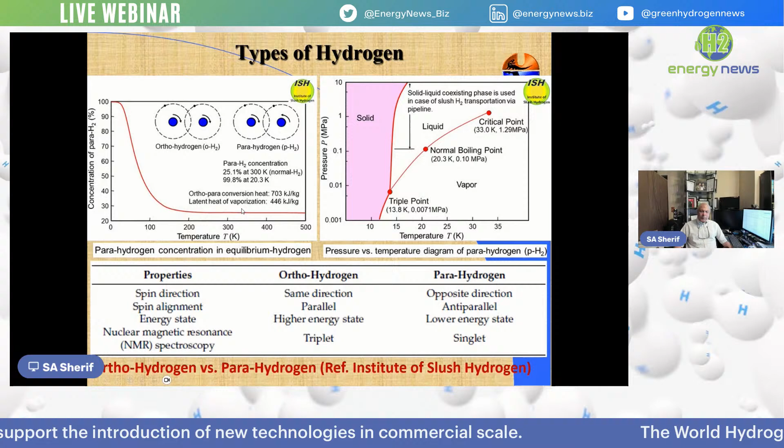Now if you look at the bottom of this slide, you'll see the distinction between orthohydrogen and parahydrogen is in several features. One is the spin direction - the nuclear spin is in the opposite direction for parahydrogen. If you compare the top left part of the slide to orthohydrogen, the spin is in the same direction. The spin alignment is also parallel, so-called parallel in ortho and anti-parallel in para.

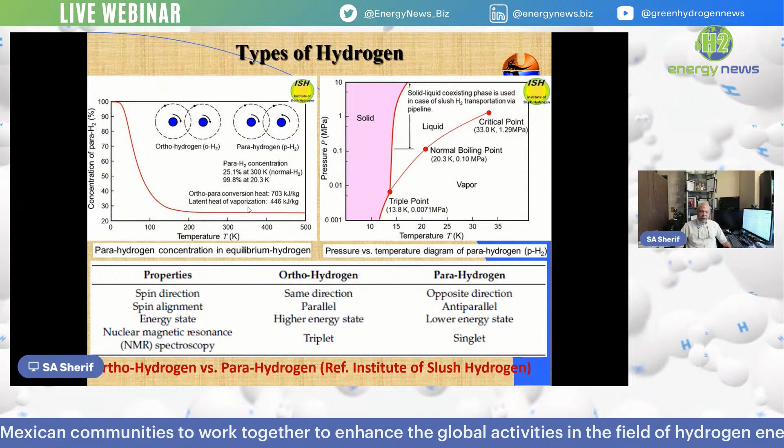The energy state is higher in ortho - that's the higher energy state and less stable form. The nuclear magnetic resonance spectroscopy is triplet for orthohydrogen and singlet for parahydrogen. This information came from the Institute of Slush Hydrogen - they have it on their website.

Now let's talk about the Joule-Thomson coefficient. It is thermodynamically defined as the ratio between the temperature decrease and the pressure decrease, meaning the temperature gradient to the pressure gradient - partial T, partial P - and you have to do that at constant enthalpy to get the exact definition of the Joule-Thomson coefficient.

The Joule-Thomson coefficient should, in general, be a positive number, because as the temperature goes down, the pressure goes down, and as the pressure goes up, the temperature goes up, and so on. So they always go hand in hand.

But in some cases you may have a negative Joule-Thomson coefficient, which means that expanding - reducing the pressure, putting hydrogen in a bigger container at lower pressure - you would expect the temperature to go down, meaning a cooling process. In some cases you may actually have a rise in temperature when that happens, and that's what we call the inversion temperature.

The inversion temperature is where the Joule-Thomson process, which is an isenthalpic expansion process in a Joule-Thomson valve, occurs - typically the case when you have flow going through a valve, ignoring kinetic and potential energy, from the entrance to the exit of the valve. You'll find that the enthalpy remains constant across the valve. This is what we call a Joule-Thomson process, or Joule-Thomson valve. The inversion temperature for hydrogen is about 200 Kelvin.

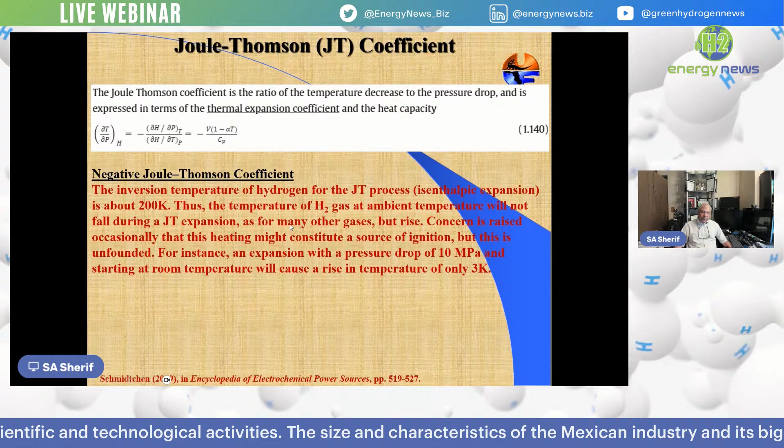Some people think that might cause ignition, but if you drop the pressure from about 10 megapascal, which is huge, keep in mind atmospheric pressure is 100 kilopascal, that's 0.1 megapascal, if you drop the pressure by 10 megapascal, you only have a rise in temperature of about 3 degrees Kelvin, or 3 degrees Celsius.

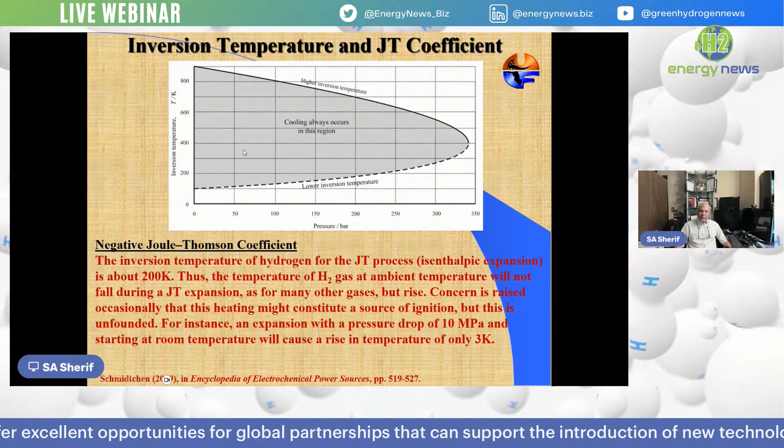It's the same thing. Now, the inversion temperature and the Joule-Thomson coefficient are best represented, in this case, for air. We took air as an example. You will see that the inversion temperature has a maximum value and a minimum value. The inversion temperature for air has a maximum value of about 850 degrees Kelvin, and a minimum value of about 100 Kelvin.

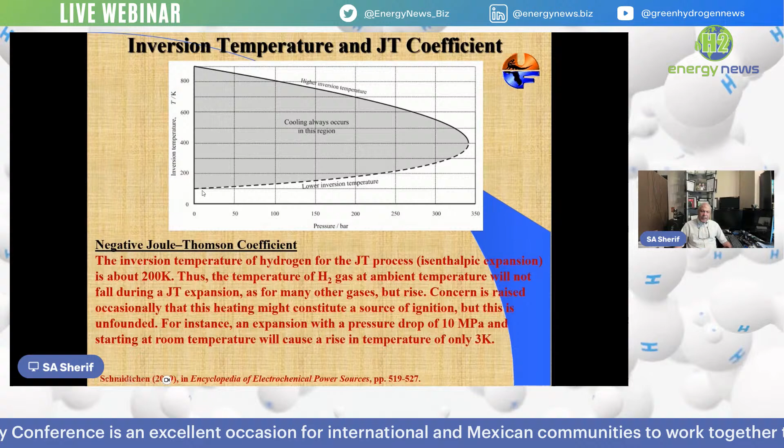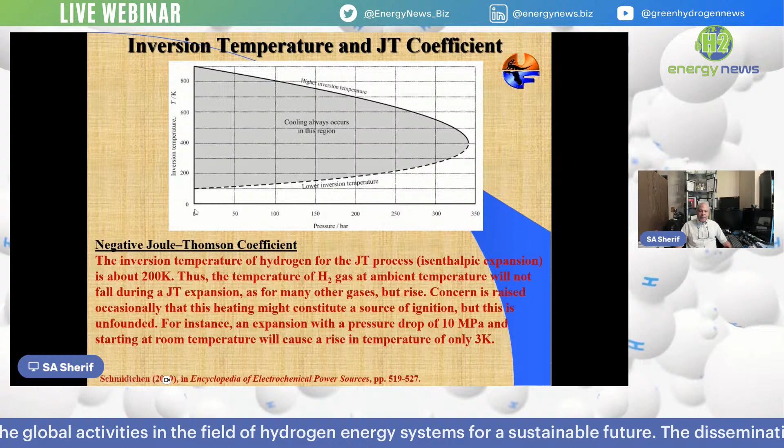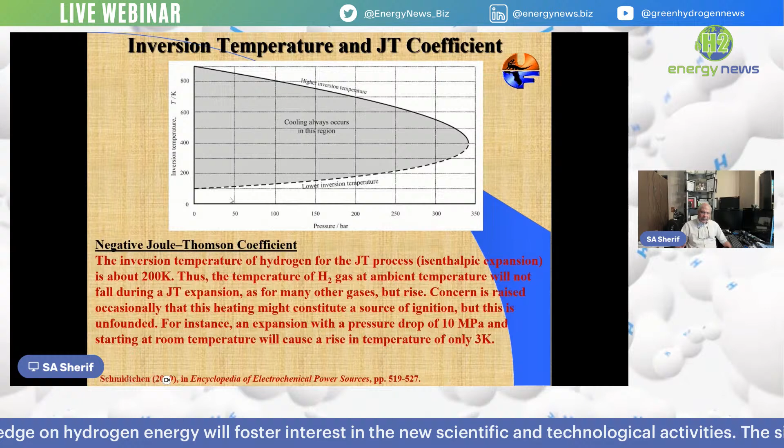So you can see the lower inversion curve and the higher inversion curve. Essentially, what I'm saying is that in order for you to reach a minimum or maximum inversion temperature, the pressure has to be zero. You can see where the pressure is zero on the horizontal axis. Both the lower inversion curve and the higher inversion curve hit the vertical axis, meaning the pressure is zero. The values associated with those two points would be the lower, or minimum, and maximum inversion temperature for air.

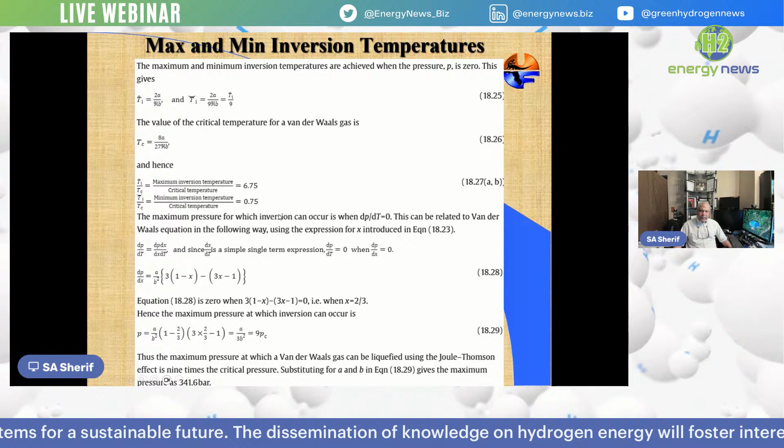So this is basically the take-home message for these two slides. Now I'm going to go to the next topic, which is the production of liquid hydrogen, in this case the liquefaction of hydrogen. I have only selected 3 cycles for you. There are many other cycles involved in liquefaction, and this is going to be under the heading of conventional liquefiers, or conventional liquefaction cycles or systems.

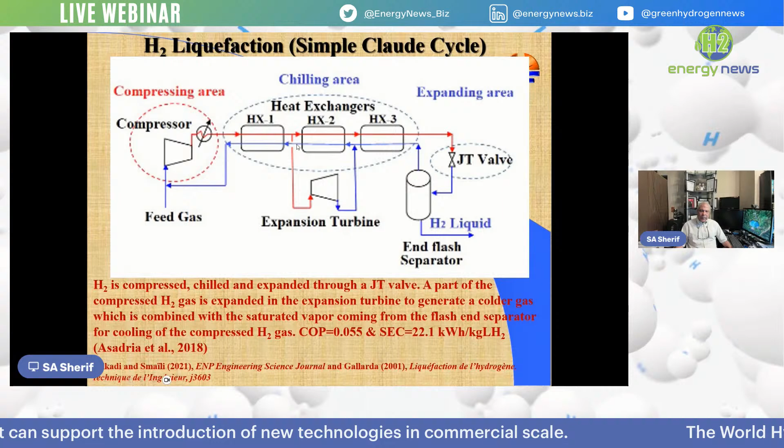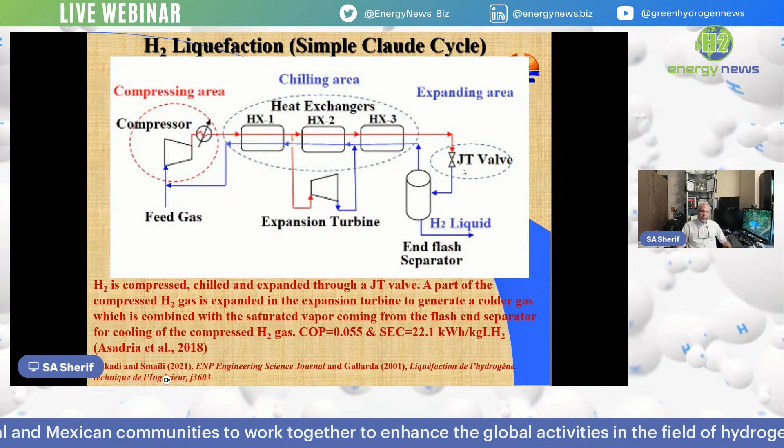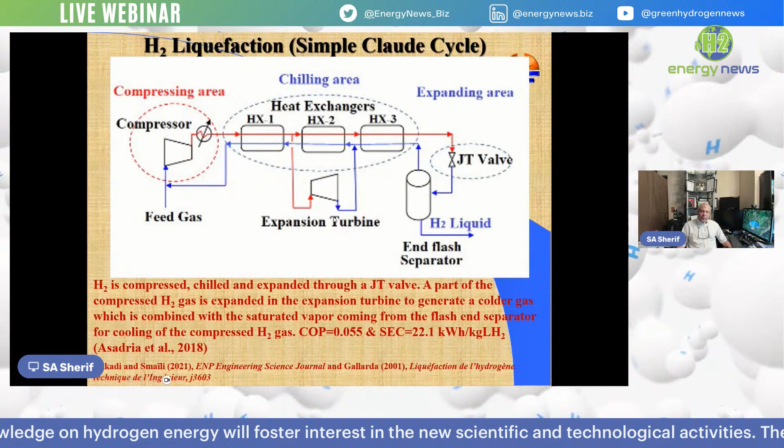In this case, the simple Claude cycle is a very common one. In the simple Claude cycle, basically what you have is the feed gas fed into the compressor, and then you have heat exchangers. The hydrogen is compressed and chilled and expanded through a Joule-Thomson valve. You see the Joule-Thomson valve on the right hand side here, the JT valve. Then a part of that compressed hydrogen gas is expanded in the expansion turbine, which you can see in the middle of the page here, and then it goes back into the feed gas line.

Asadria et al. in 2018 did a study on this and computed the coefficient of performance of about 0.055 and a specific energy consumption of about 22.1 kilowatt hours per kilogram of liquid hydrogen.

If you go to the Brayton liquefaction cycle, it uses helium sometimes, or most of the time it actually uses helium mixed with neon, and it uses those two as an external refrigerant.

The cycle has a compressor that compresses the gas from 3 bars to 17 bars, that's about 3 atmospheres to 17 atmospheres. It has 2 parallel turbines expanding the helium gas, bringing it back from 17 bars to 3 bars. And they have an ambient refrigerant heat exchanger that cools the compressed helium.

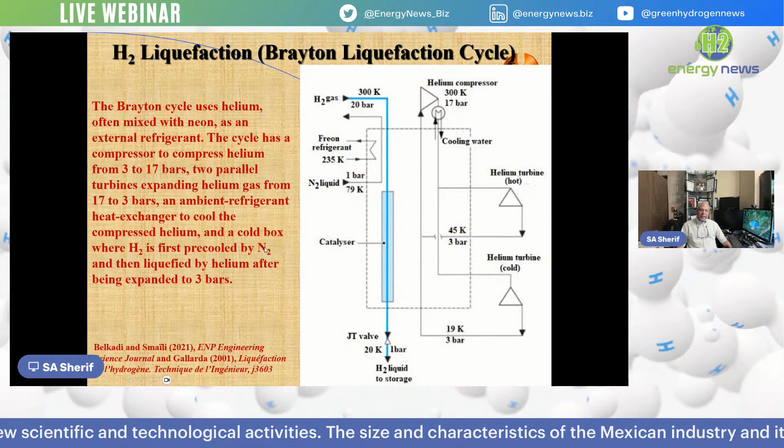Then there is a cold box where the hydrogen is first pre-cooled by nitrogen. There's a bath of nitrogen, and then it's liquefied by helium after being expanded to 3 bars.

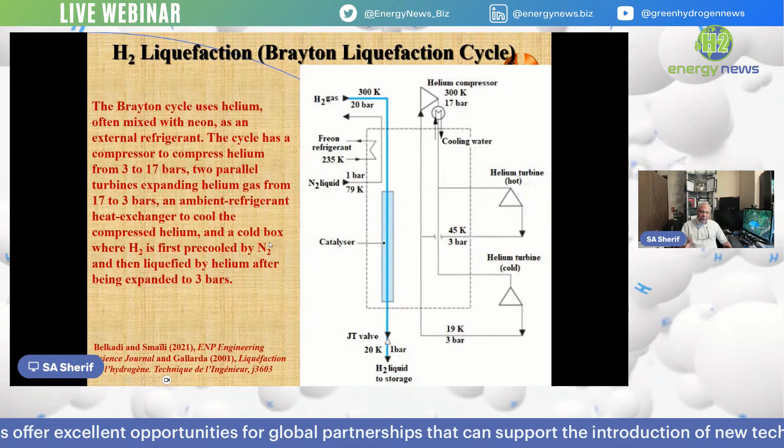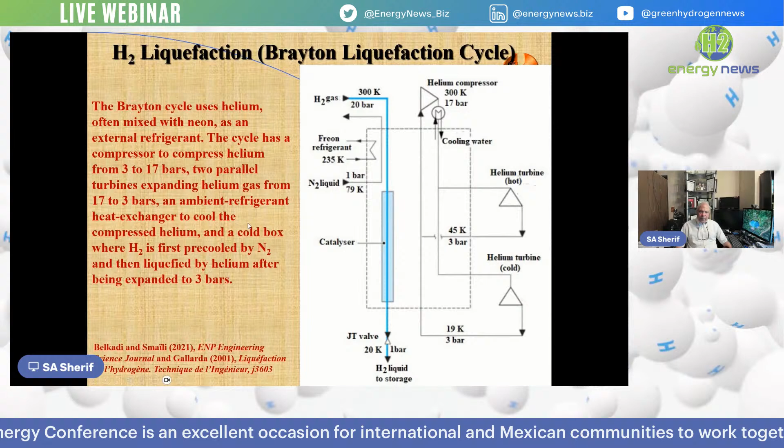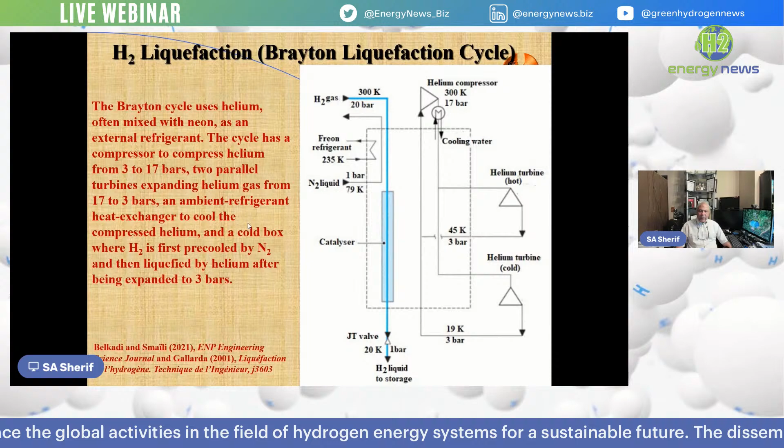Again, if any of you studied thermodynamics, you'd know that in order to operate on a cycle, what you do with your right hand, you have to undo with your left hand. If you raise the pressure, you have to lower the pressure, and if you heat, you have to cool. So in this case, the compressor and the expander, or the turbine, operate as antidotes, where the compressor raises the pressure and the turbine lowers it. And of course, one of the heat exchangers is going to be a heating device, and the other a cooling device.

If you go to the so-called pre-cooled Linde-Hampson cycle—the Linde-Hampson cycle was one of the very earliest cycles of liquefaction, very common, very popular—the pre-cooled version is what I selected for you because I wanted to make a point about pre-cooling.

Now, if you realize that the maximum inversion temperature of hydrogen is about 200 Kelvin, that is below ambient temperature by leaps and bounds. Therefore, pre-cooling is going to be an inevitable necessity.

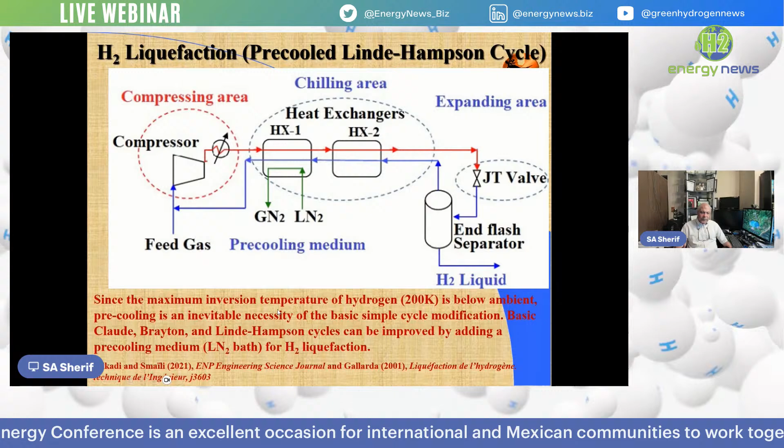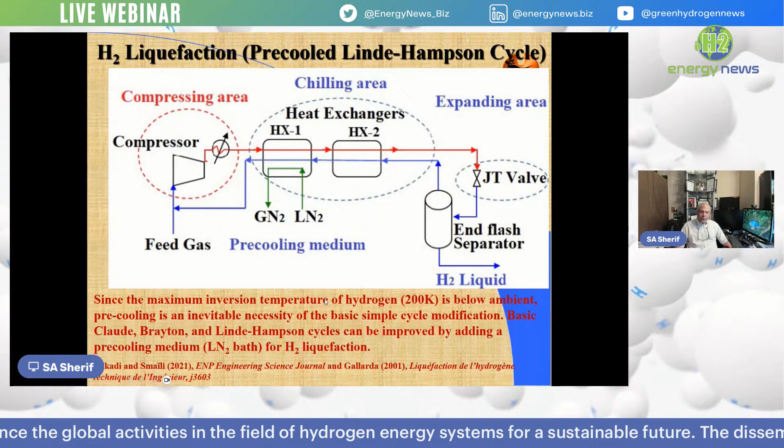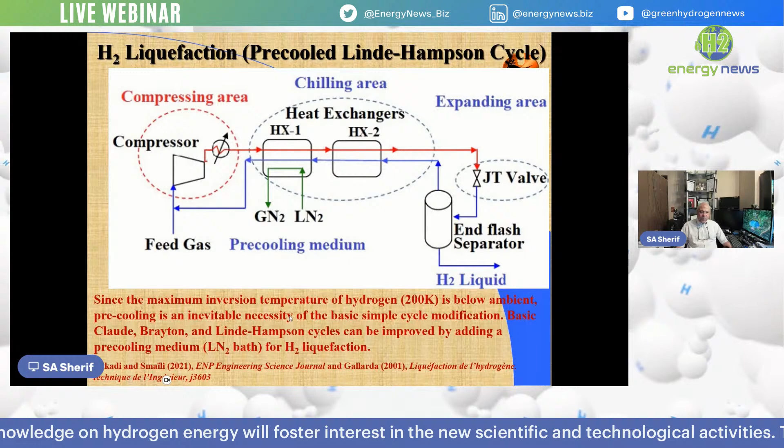To apply it on the basic simple Linde-Hampson cycle, or the basic Claude cycle, or the basic Brayton cycle—any of these basic cycles, in order to make it effective, you're going to have to do some pre-cooling, and that pre-cooling is in fact going to result in improved coefficient of performance for that cycle.

The pre-cooling here is done by a liquid nitrogen bath, whose boiling temperature is about 77 Kelvin. In other words, liquid nitrogen will vaporize or become gas at 77 Kelvin and 1 atmosphere.

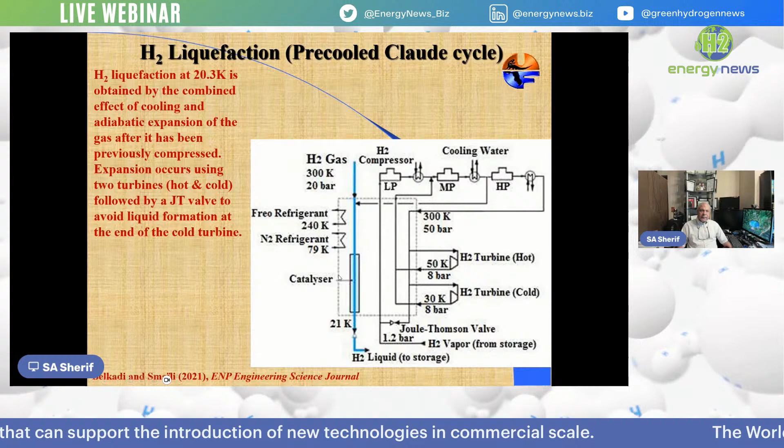Now, this is the pre-cooled Claude cycle, and you will see that you essentially need to reach 20.3 Kelvin in order to get to the liquid hydrogen temperature, which is 253 degrees below 0 Celsius.

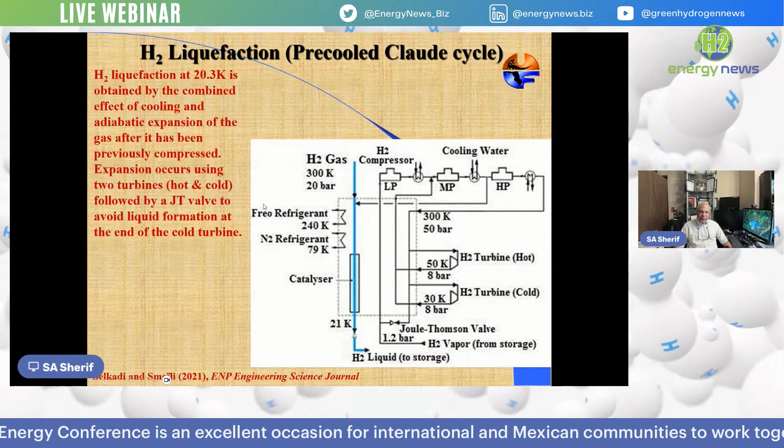That is achieved by a combination of two things: the actual cooling that you are doing, and the so-called adiabatic expansion of the gas. Adiabatic expansion is a process that results in cooling where the temperature drops, and of course, adiabatic means there is no heat transfer involved.

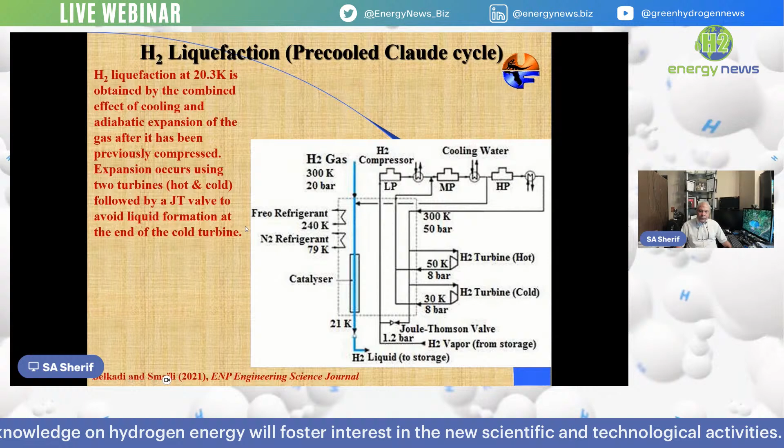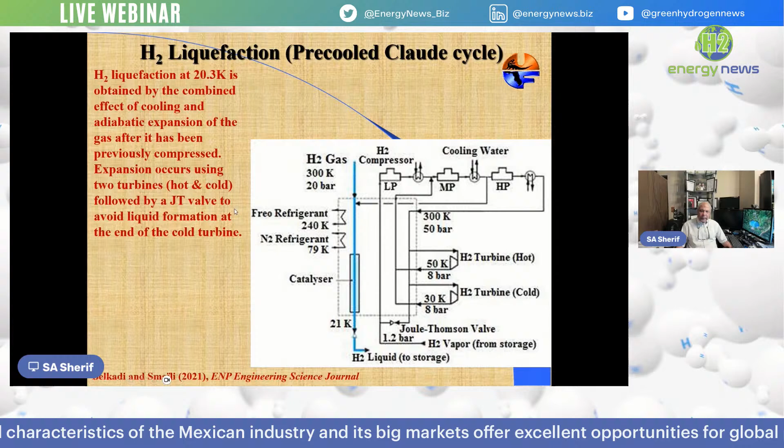And then after you do that, you do the expansion using two turbines, one hot turbine and one cold turbine, followed by a Joule-Thomson valve. That Joule-Thomson valve does an isenthalpic expansion process, and you end up having a cooling process as a consequence.

Now, switching from conventional liquefiers to non-conventional liquefiers, the most famous non-conventional liquefier is the so-called magnetic liquefier. There are many other ways to do cooling, such as thermoacoustic cooling, but magnetic refrigeration or magnetic liquefaction has emerged since the 1980s and 90s, and there were a number of leading researchers in that field.

The most notable one would be Dr. John Barclay, who used to work for a company in Wisconsin, along with Dr. Carl Zimm and Dr. Tony De Gregoria. That group was working very hard on magnetic liquefaction of hydrogen. Dr. Barclay later moved to the University of Victoria in British Columbia, and then later moved to industry.

He has published many papers and has been involved in the production of one of the hydrogen magnetic liquefiers on a commercial scale. There was a 0.1 ton per day active magnetic regenerative hydrogen liquefier at Astronautics Corporation of America in Madison, Wisconsin, built through the Energy Technology Center there, able to produce 0.1 ton of liquefied hydrogen per day.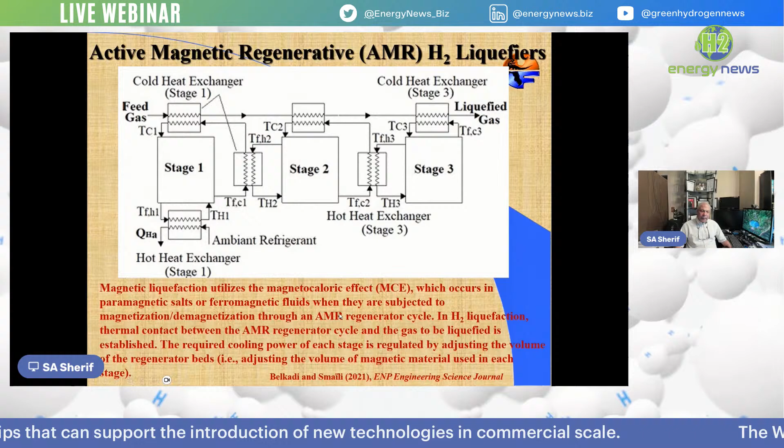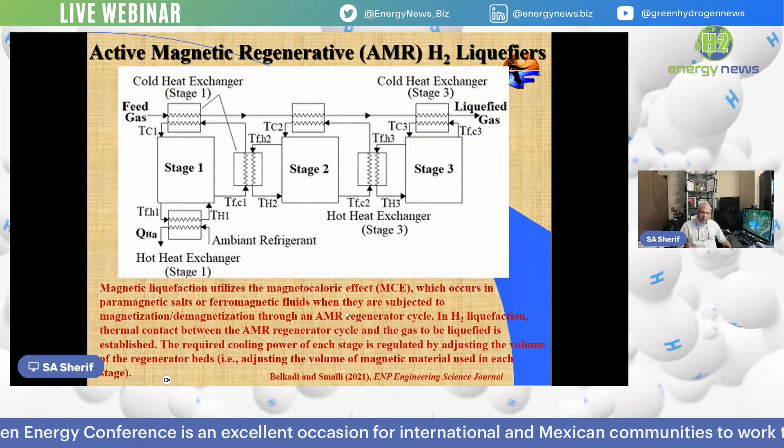You apply the magnetic field, that's the magnetization stroke, where the temperature goes up, and then you de-apply the magnetic field, and the temperature drops as a consequence. Because of the hysteresis effect, there will be an overall decrease in temperature. This is not a zero-sum game; this is a process that results in an overall decrease in temperature.

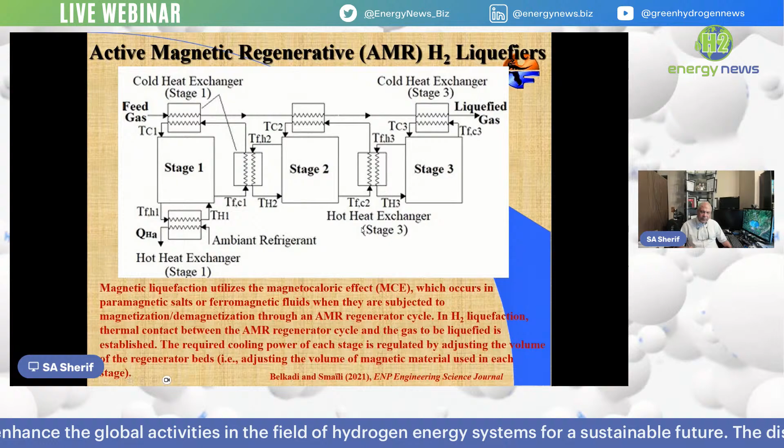Now, moving on to the next topic, the economics of hydrogen liquefaction. This is work we did many years ago, where we examined how much it takes to produce 1 kilogram of liquefied hydrogen. We did a study incorporating a lot of factors, which I'll get into shortly. But first, I want to show you that we examined three different scenarios.

One is a so-called conceptual liquefier, essentially a small-scale hydrogen liquefier, contrasted with a very large, optimized design-scale hydrogen liquefier. In between, we had an intermediate hydrogen liquefier, between the smaller and larger sizes, so we could get a feel for where we stand comparing large scale versus small scale liquefaction processes.

The economics of hydrogen liquefaction are represented by several graphs here, which I'll go over quickly. We looked at operation and maintenance cost, and the capital investment, or fixed charges on capital investment, comparing those as a function of production rate. We went from 100 kilograms per hour of liquefied hydrogen up to 29,700 kilograms per hour. You can see that as production rate increases, the cost per kilogram of liquefied hydrogen goes down.

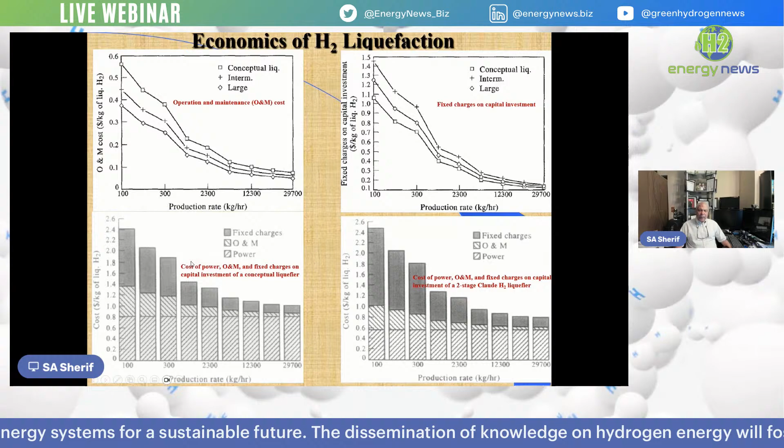Don't necessarily look at the actual dollar value, because a dollar today isn't the same as a dollar 10, 15, 20 years ago, but the relative cost should remain the same.

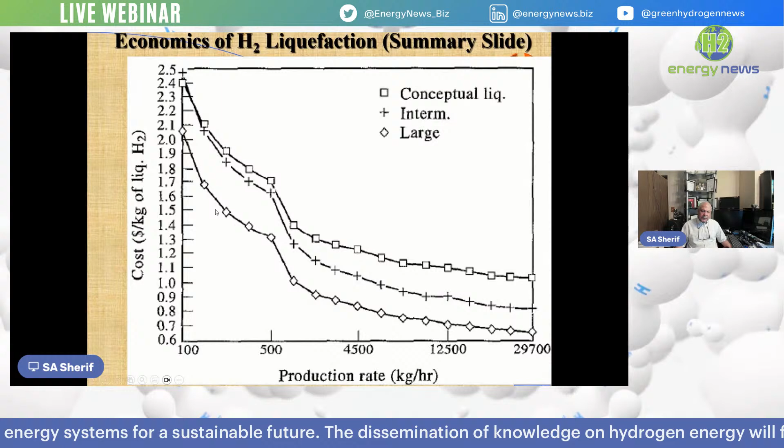This is a summary slide where we take all of these costs into account and look at how much money it costs to produce a kilogram of liquefied hydrogen for the three different systems we identified. You will see that the large scale liquefier has the lowest curve and the lowest cost.

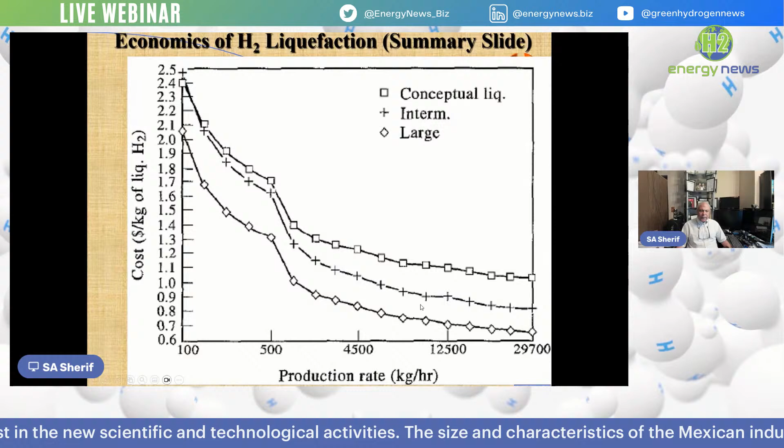So in summary, what we found is that the electric or energy cost per kilogram of liquefied hydrogen does depend on the liquefier efficiency, but is less dependent on the production rate. It depends on the production rate, but not as much as it does on the liquefier efficiency.

The increase in efficiency and production rate cause the operation and maintenance costs to decrease, relatively speaking. The fixed charges on capital investment depend on the system being utilized, whether it's a Claude system, a Linde-Hampson system, or a Brayton cycle type system.

But what you will see is that the fixed charges on capital investment cost become lower at higher production rates. The power cost remains pretty constant regardless of production rate, whereas the operation and maintenance cost decreases as production rate increases. The fixed charges on capital investment also decrease as production rate increases. The operation and maintenance cost is numerically the smallest of the three costs.

Further observations are associated with the compressors and the heat exchangers. The compressors and heat exchangers, of course, include the intercoolers and the aftercoolers and all those heat exchange devices. These are the most important components in a liquefaction plant.

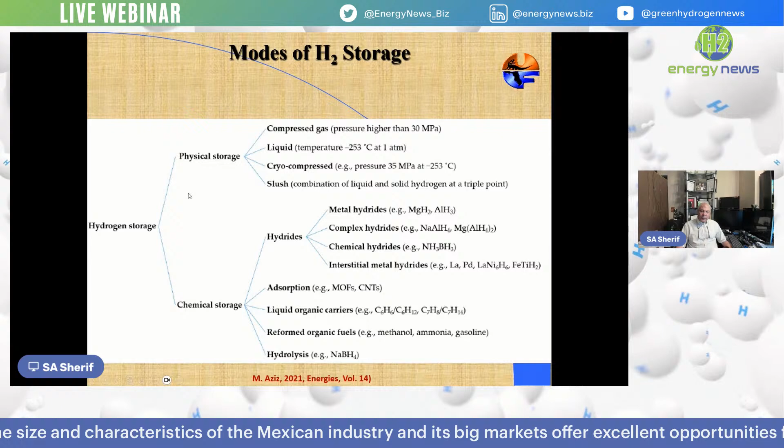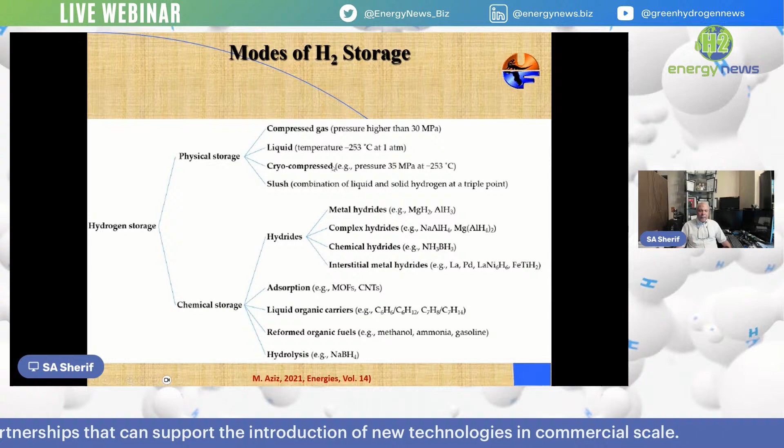He called it physical storage versus chemical storage. In the physical storage category, he talks about compressed hydrogen, liquefied hydrogen, and cryocompressed hydrogen. I'm going to talk about that a little later in the presentation. The cryocompressed hydrogen is essentially compressed liquid.

In other words, you have liquid hydrogen under pressure, and slush hydrogen, which is a combination of liquid and solid at the triple point. Then, of course, the metal hydrides. There are metal hydrides, complex hydrides, chemical hydrides, and interstitial metal hydrides. These are all different versions of the metal hydride, or hydrides, category.

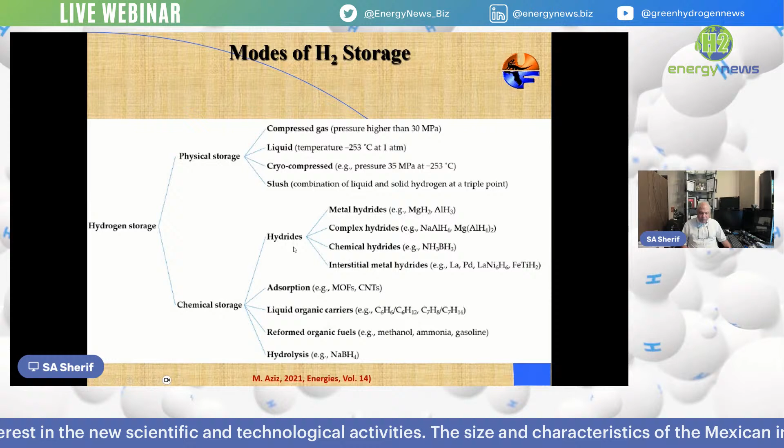And then under chemical storage, there is the adsorption, the liquid organic carriers, the reformed organic fuels, and hydrolysis. All of those are different possibilities, but all of that is outside the scope of what we have today. We're going to focus only on the liquid storage.

So to go back to a quick comparison of the so-called storage types and densities, the densities here are going to be both gravimetric and volumetric. The gravimetric is per kilogram, and the volumetric is per meter cube.

So if you look, for example, at large volume storage, which would be somewhere between 100 meter cube to 10,000 meter cube of storage, there's underground storage. Essentially, you can have an underground cavern where you store gaseous hydrogen, and you could have somewhere between 5 and 10 kilogram of hydrogen per meter cube of storage.

If you go to pressurized gas storage, which is above ground, the gravimetric density is not good, and the volumetric density is not great either. You can see that it's between 2 and 16. The gravimetric density, of course, is not very good. The metal hydride storage has gravimetric density that is not very good, but the volumetric density is very nice, 50 to 55.

Liquid hydrogen is the gold standard as far as the volumetric density and the gravimetric density. Liquid hydrogen gives 1 kilogram of hydrogen per 1 kilogram of storage, and 65 to 69 kilogram of hydrogen per meter cube of storage.

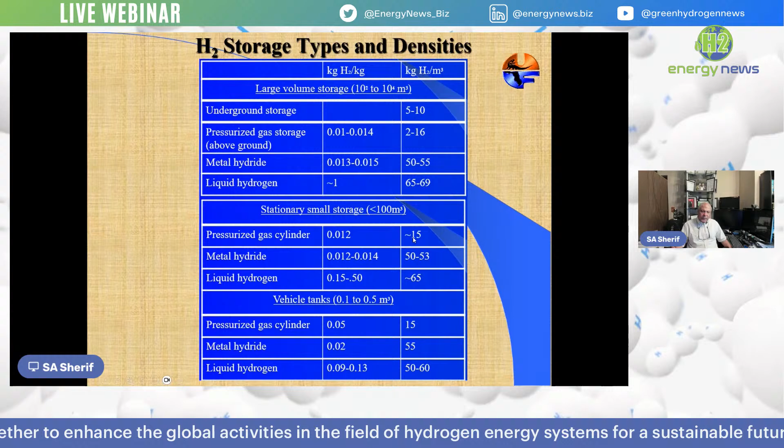If you go to stationary small storage, under 100 meter cube, you're looking at pressurized gas cylinders, mostly in domestic or commercial applications. The volumetric density is about 15, and the gravimetric density is not great. Metal hydrides have a nice volumetric density, 50 to 53. Liquid hydrogen, of course, is the gold standard at 65.

For vehicles, storage is between 0.1 and 0.5 meter cube. You don't want a lot of hydrogen stored on your vehicle because it will make the vehicle heavier and affect the gas mileage. You could have pressurized gas cylinders, which give 15 kilogram of hydrogen per meter cube. You could have metal hydride, or liquid hydrogen, more or less the same, but not as attractive as in large volume storage since the system is smaller.

Now, what are the challenges in liquid hydrogen storage? There are many, but let's pick the most obvious ones. The so-called orthopara conversion is an exothermic reaction that releases heat and causes the liquid hydrogen to vaporize or become gaseous hydrogen.

Of course, there's also heat leak, which is the heat transfer from outside to inside the storage vessel or inside the tank.

Thermal stratification is when you have a tank of liquid hydrogen, and the liquid stratifies such that the warmer liquid hydrogen goes up and the cooler liquid hydrogen goes down to the bottom of the tank. So if you measure the temperature at the higher elevations or layers of the tank, you'll see it's significantly larger than at the lower elevations.

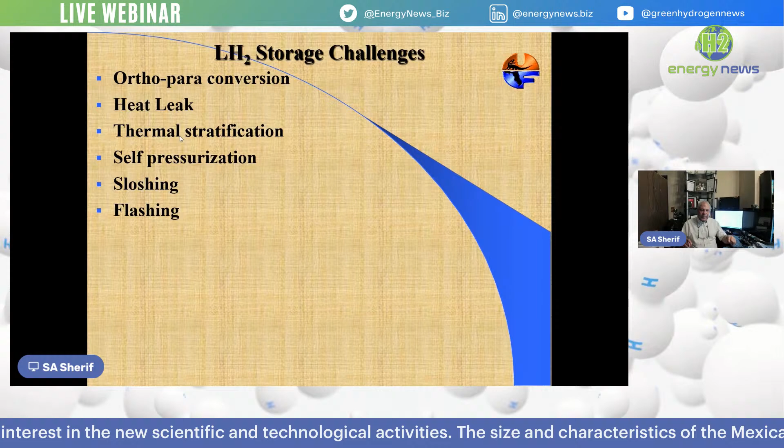Because of heat leak from the side walls of the tank, you'll find that the stratified layer also covers the vicinity of the inside walls, so there's a warmer layer near the walls. This creates convection currents: when the warmer liquid hydrogen goes up, its density goes down, and as a consequence, because the density is lower, it starts moving upward.

As it moves downward, it gets cooled by physically touching the lower layers of colder hydrogen, and as it gets cooled, the density goes up again. As the density goes up, it continues to fall. Then as it touches the side walls, it warms up again and rises because of the lower density, and the cycle continues. You end up with convection currents inside the tank as a result of this stratification.

This stratification is not good news for a multitude of reasons, not the least of which is that you don't have a homogeneously uniform temperature distribution inside the tank.

Self-pressurization happens when the liquid hydrogen becomes gas and builds the pressure up. As the liquid converts into gas and the gas collects on the surface of the liquid, the pressure builds up, and eventually some of the hydrogen leaks out because of the higher pressure inside, since flow goes from higher pressure to lower pressure.

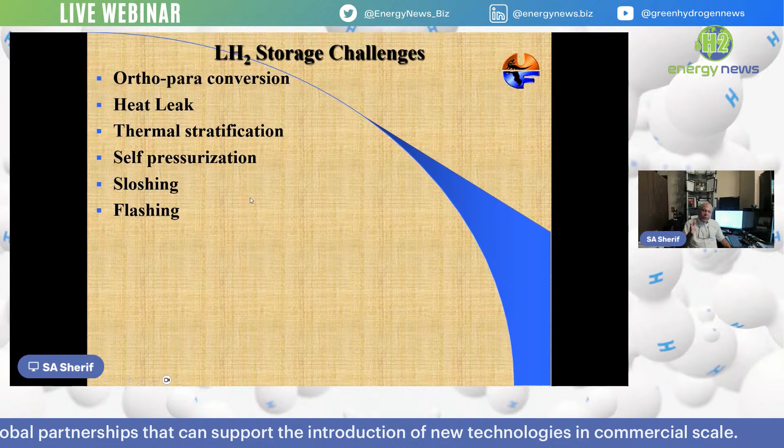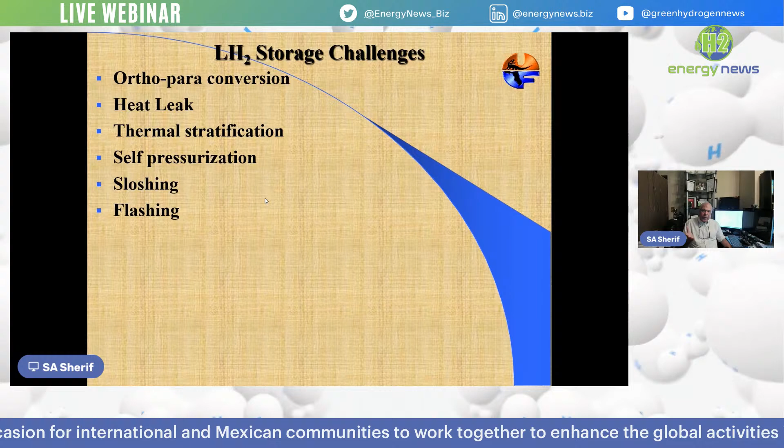Flashing is a phenomenon that takes place when you transfer liquid hydrogen from one reservoir to another. For example, at the production plant, the liquefaction plant, you transfer that liquid into a tanker, which could be big or small. You could also transfer it into larger storage tanks, but tankers are normally smaller than the larger stationary storage tanks. So in order for the liquid to transfer from the source reservoir to the sink tank, the pressure has to be higher at the source and lower at the sink. This means that when liquid goes from the higher pressure reservoir to the lower pressure tank, some of it will flash into gas or vapor. That's essentially what flashing is.

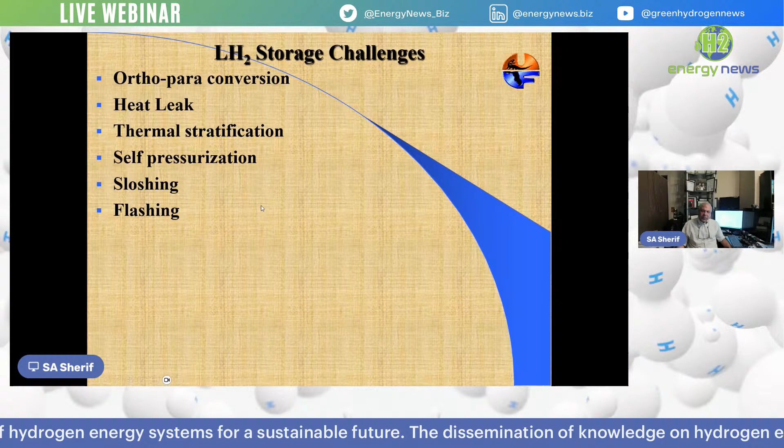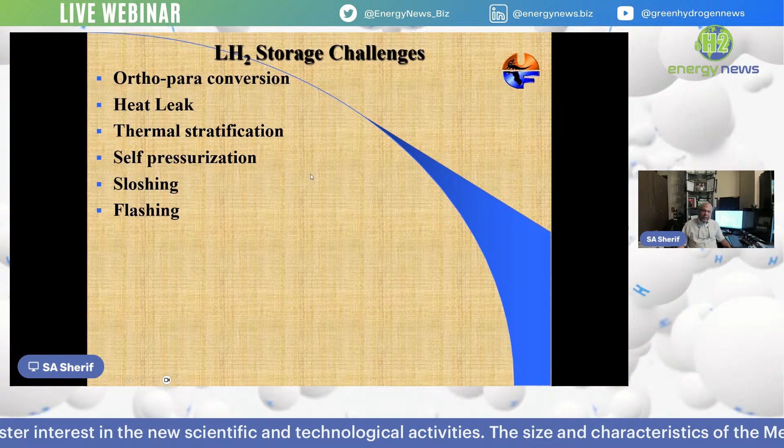It's a necessary evil; there's very little we can do about it. We can try to minimize it as much as possible by using a pump, and I'll show you some of the work Argonne National Lab has done to see if using a pump will actually make things faster, and therefore result in less boil-off losses.

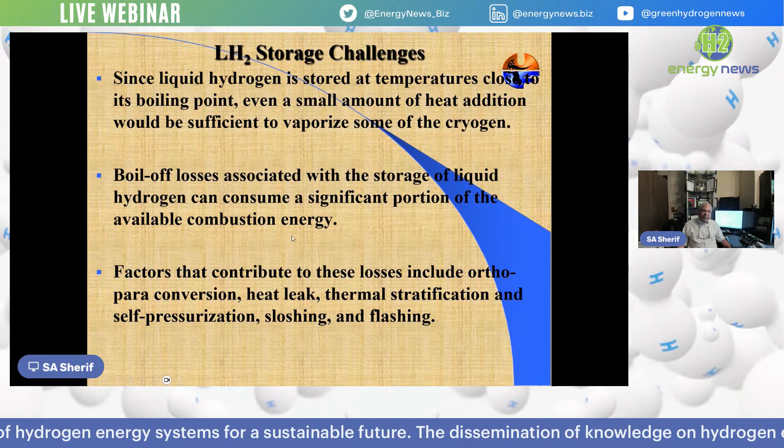Here are some common sense observations. Since liquid hydrogen is typically stored at temperatures very close to its boiling point, 20.3 Kelvin or 253 degrees below 0 Celsius, even a small amount of heat addition would be sufficient to vaporize the cryogen, the liquid hydrogen. The boil-off losses associated with storage of the liquid can consume a significant portion of the available combustion energy. Some people have guesstimated that to be about 30% of the available combustion energy, as far as the liquefaction cost or liquefaction energy used could be as high as 30%.

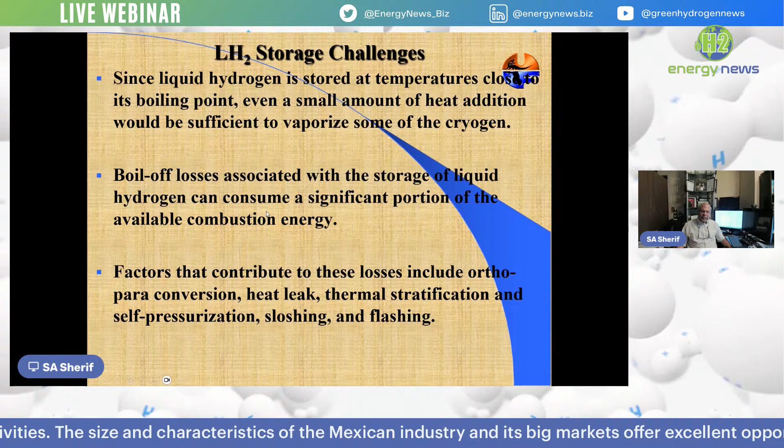Factors that contribute to those losses include orthopara conversion, heat leak, thermal stratification, self-pressurization, sloshing, and flashing, as I just discussed. The heat influx into the tank causes boil off, and that can come from cables, pipes, and fittings. There will be convection losses and radiation losses - in this case gains - meaning heat coming from the outside to the inside.

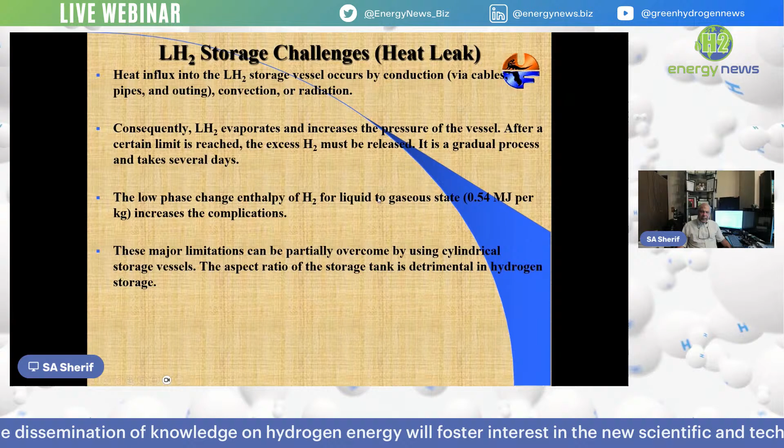The phase change enthalpy of hydrogen for liquid to gas is about 540 kilojoules per kilogram. That's the phase change enthalpy, also called the latent heat associated with the phase change.

There are limitations. These can be partially overcome by using cylindrical storage tanks, where the idea is to have the aspect ratio as small as possible. You don't want to use tanks with large aspect ratios - those increase heat transfer and as a consequence increase boil off. Storage tanks with complicated structures and high aspect ratios are not suitable. Large tanks with optimum aspect ratios could work reasonably well for you.

There are also so-called radiation shields. You could have multiple layers, like 40 layers, that can provide super insulation to the hydrogen tank. Also, there are cooling down losses that may occur during refilling of the cylinder, because the storage vessel has to be cooled to minus 253 degrees Celsius.

The unwanted losses due to the complex hydrogen storage infrastructure, as well as the complex structure of the storage vessel, make liquid hydrogen storage more expensive and complicated for transportation applications. As I said, it's been theorized that 30% of the net calorific value of hydrogen can be eaten up in the liquefaction and reliquefaction process.

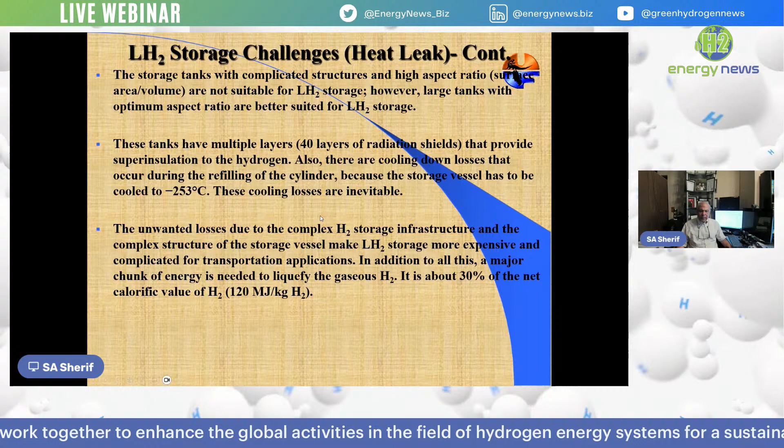Now I'm going to go to the last part of the study and show you some slides from a presentation made by three researchers from Argonne National Lab. They made that presentation earlier in 2024 at the Hydrogen Infrastructure Workshop, organized by the Hydrogen and Fuel Cell Technologies Office. I'll give you the highlights of that study.

Basically, what they did was look at the vehicular storage of liquid hydrogen, meaning in cars and trucks, but predominantly in heavy-duty vehicles, large tankers. What they did, basically, they looked at...

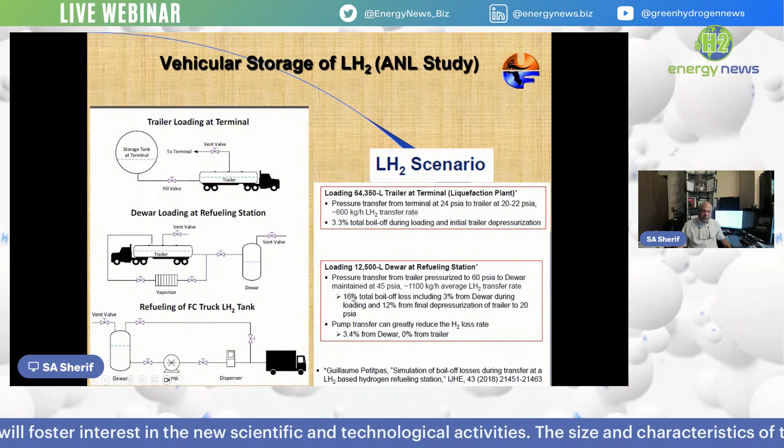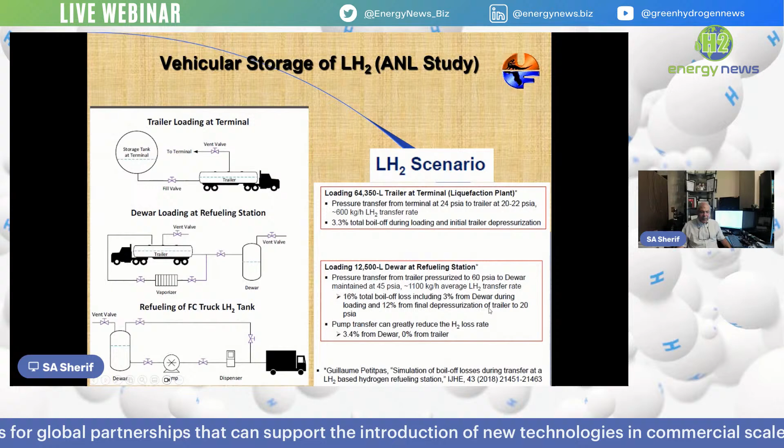Now the next scenario is loading 12,500 liters of liquefied hydrogen at, let's say, a refueling station. Here the scale is much smaller, and the pressure has to be higher. The source is 60 psi, the sink is 45 psi, and the transfer rate is about 1,100 kilogram per hour of liquefied hydrogen. Here the boil-off losses are significantly higher: 16% total boil-off losses versus 3.3% in the first case. 3% of that comes from boil-off during loading, and 12% comes from the final depressurization of the trailer, which has to go all the way down to 20 psi.

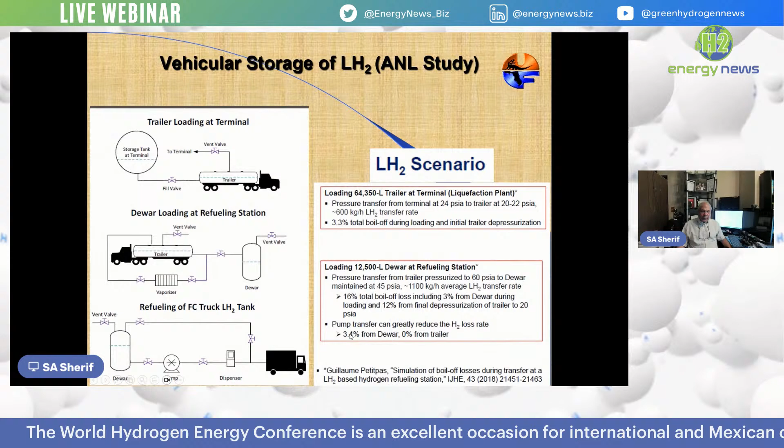Now, if you use a pump to transfer, that can greatly reduce the hydrogen loss rate. If you do it from the Dewar, you're looking at 3.4%, and from the trailer, it's about 0%. All right, so that's essentially what they did.

Now they also looked at four different possibilities. Two of them are in the liquid hydrogen scenario: there's liquid hydrogen, LH2, and then there's so-called subcooled liquid hydrogen, SLH2, where the temperature is below the saturation temperature at the prevailing pressure. Here they also looked at LH2 transfer without an onboard pump versus with an onboard pump. So LH2-1 uses the pump to speed things up, and LH2 does not use a pump.

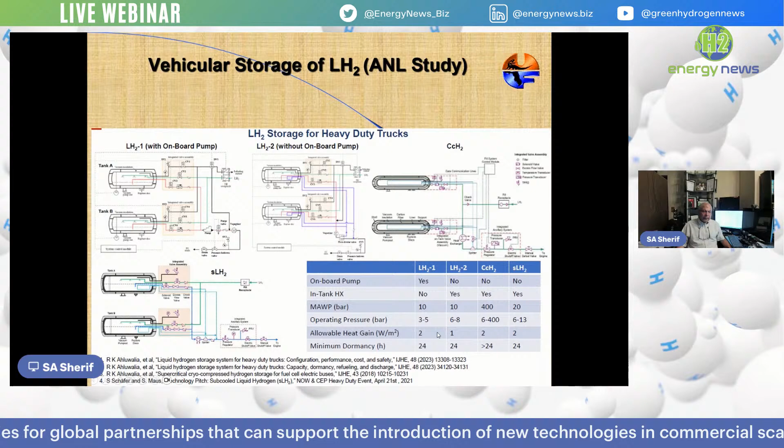The third scenario is the subcooled liquid hydrogen transfer, and the fourth is the so-called cryo-compressed hydrogen, which is essentially liquid hydrogen under pressure. If you look at the different cases, they looked at what applies to each: for example, the onboard pump is yes for LH2-1, no for LH2-2, no for cryo-compressed hydrogen, and no for subcooled liquid hydrogen. You have an in-tank heat exchanger, the allowable heat gain given for the different cases, the minimum dormancy given for different cases, and the operating pressure given for different cases.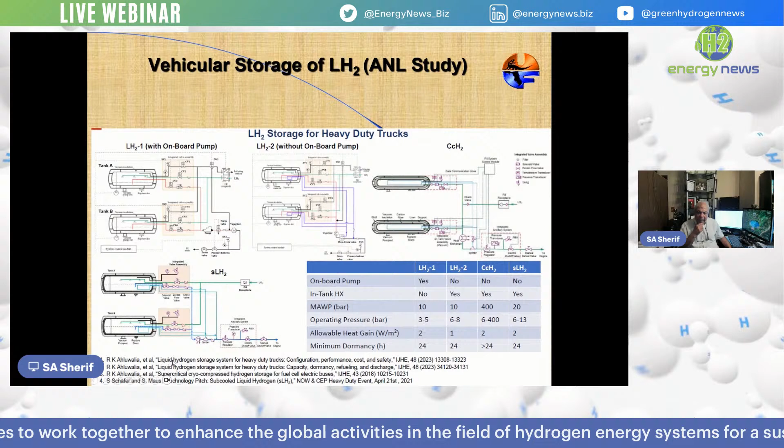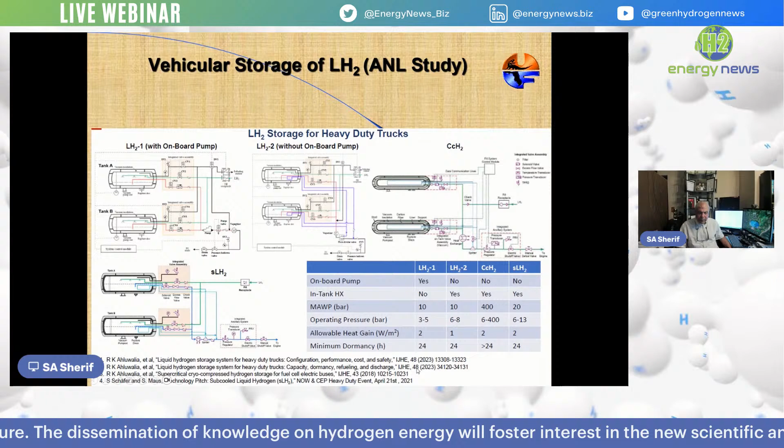And these are all actually published, three of them in the International Journal of Hydrogen Energy. If you look at the bottom of the slide, you'll see there's a paper in 2023, volume 48, and another paper in 2023, volume 48 - those are the first two papers. Then the third paper is in volume 43, from 2018. All of those have more details about that particular study.

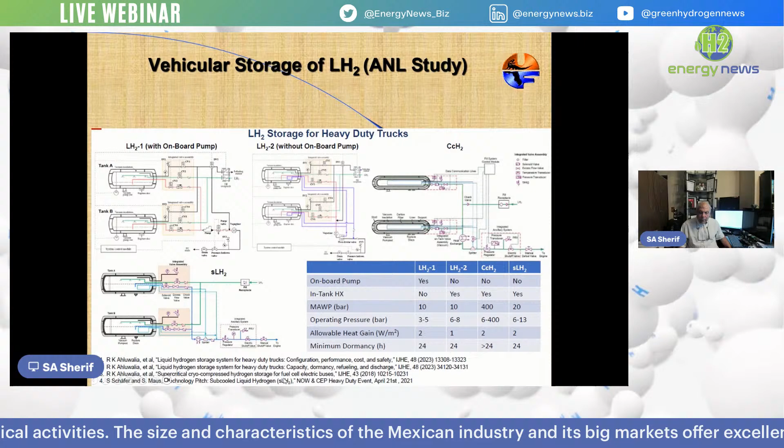And then they have, of course, the final line, which is giving you the reference regarding the subcooled liquid hydrogen.

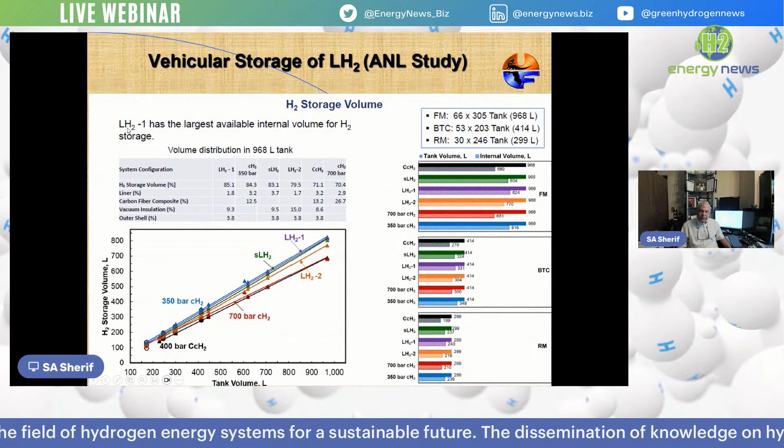Now, just on the summary of results real quick, what they did was they showed the storage volume, comparing all these cases. You're looking at 6 different scenarios: liquid hydrogen 1, liquid hydrogen 2, compressed hydrogen, subcooled liquid hydrogen, cryocompressed hydrogen, and compressed hydrogen. It's showing you which one is more attractive as far as storage volume. They concluded that the pump has the largest available internal volume for hydrogen storage. That is the first result.

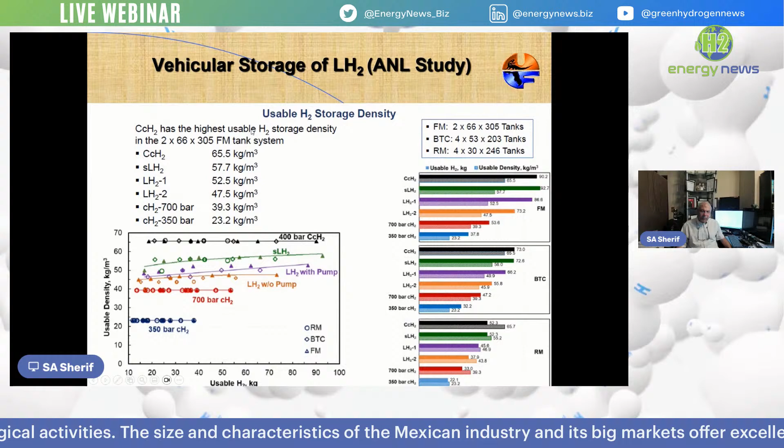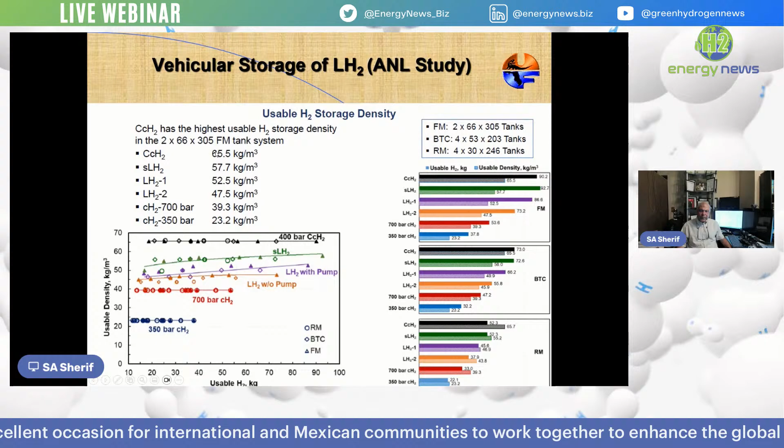If you go to the next slide, you will see that the cryocompressed hydrogen has the highest hydrogen storage density, what they call usable hydrogen storage density, given in terms of kilogram per meter cube. You can see 65.5 for the cryocompressed versus 23.2 for the compressed hydrogen at 350 bar. There's compressed hydrogen at 350 and compressed hydrogen at 700. Of course, the 700 is better than the 350, but the cryocompressed is even better, not surprisingly, because it combines the benefits of liquid and compressed hydrogen, at about 400 bar for the cryocompressed. Again, that's a comparison as far as the storage density.

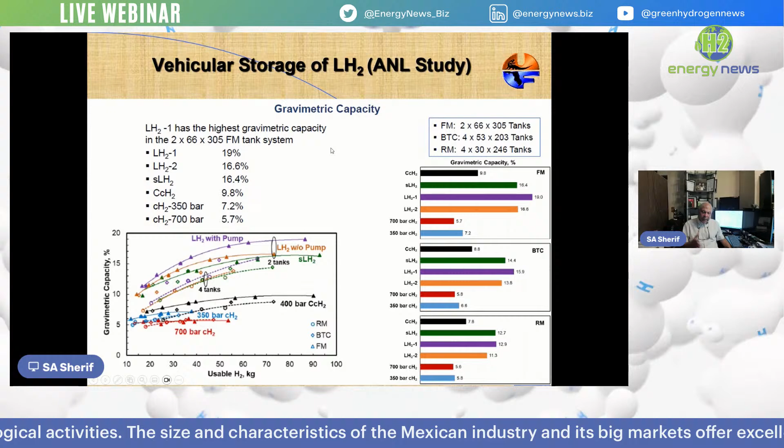Now, the next one is the so-called gravimetric density, and the gravimetric density has units of kilogram per kilogram, kilogram of hydrogen per kilogram of the system. In this case, they found that the option of using a pump, liquid hydrogen with a pump, has the highest gravimetric capacity in this particular case. This tank has these numbers.

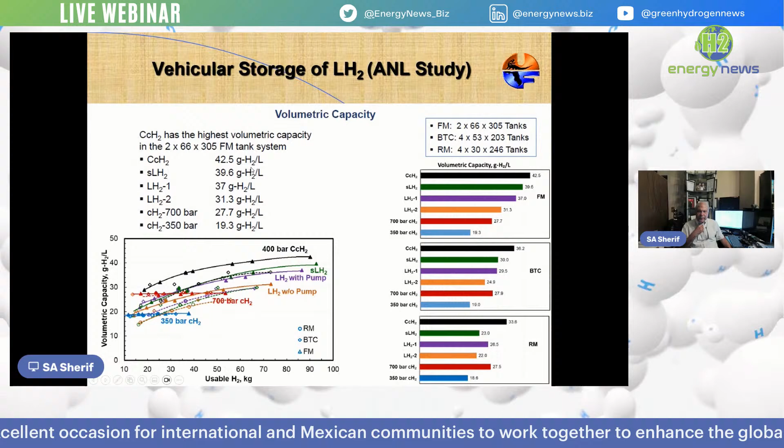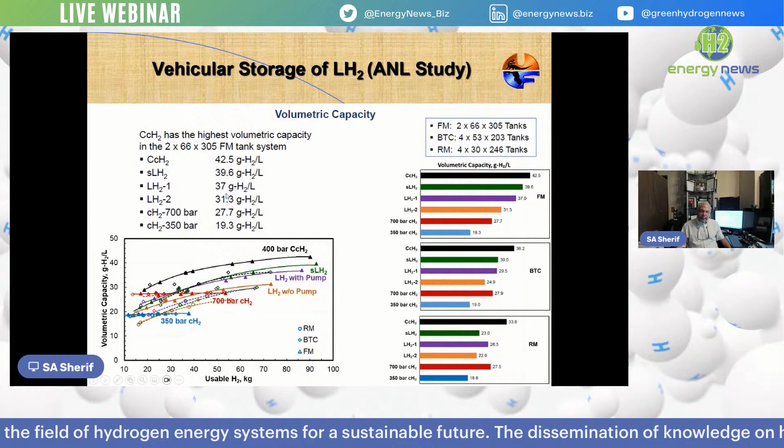Then if you go to the volumetric capacity, you'll see that the cryo-compressed hydrogen has the highest volumetric capacity. Again, not surprisingly, that is 42.5 grams of hydrogen per liter. It compares favorably, outperforming all of the other 5 options there.

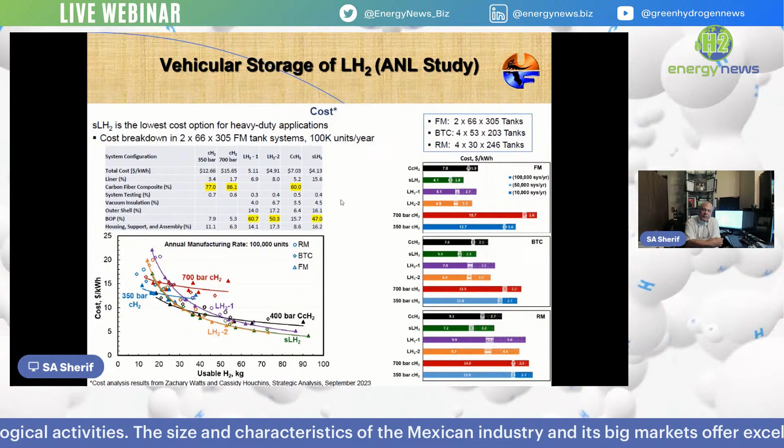And then if you look at the cost, the study concluded that the subcooled liquid hydrogen is in fact the lowest cost option, if you're doing heavy duty applications similar to the one they were describing.

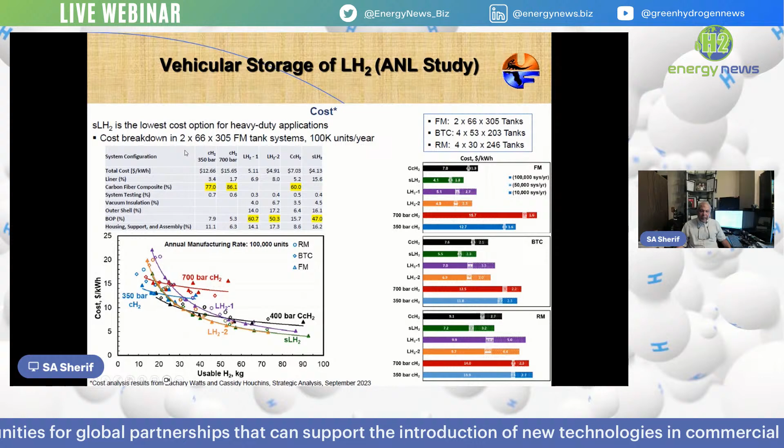So as you can see, the results are a little mixed. Some systems have more internal volume than others. Some others have more density than others. Some others have less cost than others. So you're going to have to walk your way very carefully here, because the best option is not exactly obvious.

Their future outlook: they said that cryocompressed hydrogen and subcooled liquid hydrogen seem to be attractive. They stand head and shoulders above the other different choices for heavy duty trucks, if the fuel cell system accepts hydrogen delivered at 5 bars. The second observation they made was that cryocompressed hydrogen is the only viable liquid storage option if the fuel cell system requires hydrogen to be delivered at 15 bars, which some fuel cells require in order to operate. So if your vehicle requires a 15 bar minimum to operate the fuel cell, then cryocompressed hydrogen is your best option.

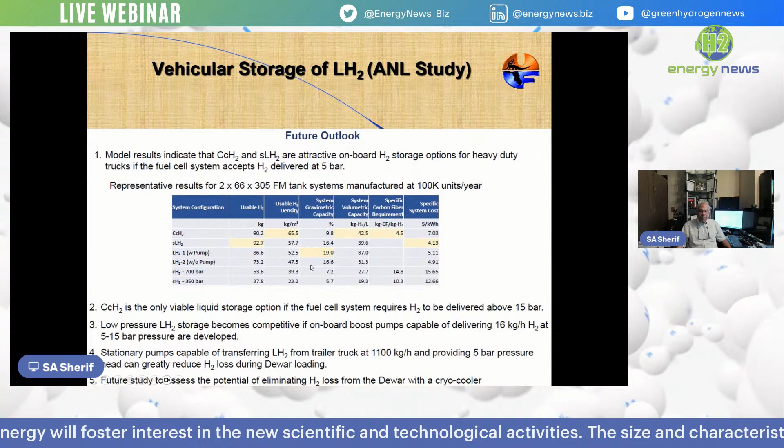The low pressure liquid hydrogen storage becomes competitive if onboard boost pumps capable of delivering 16 kilograms per hour of hydrogen at 5 to 15 bars become available. And then stationary pumps capable of transferring liquid hydrogen from the trailer truck at 1100 kilograms per hour and providing 5 bars of pressure can greatly reduce hydrogen loss during the Dewar loading. Last but not least, future study is needed to assess the potential of eliminating hydrogen loss from the Dewar with a cryocooler.

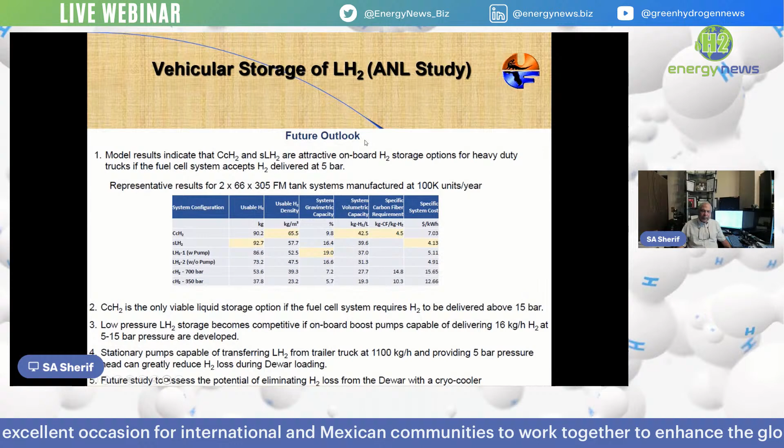This is the results of the Argonne National Lab that was presented in February 2024, and I wanted to share that with you. This is one of many, many studies that are being done. I just wanted to give you a flavor of what the research funded by the Department of Energy is looking like, that there's a lot of effort, energy, and money involved in pushing forward these different scenarios.

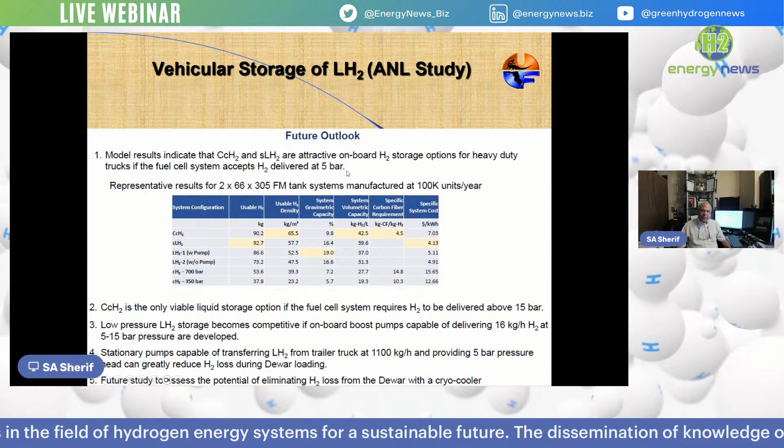Now, just to continue this line of thinking, may I remind everyone that on June 7, 2021, the Secretary of Energy launched the so-called Hydrogen Energy Earthshot to accelerate breakthroughs towards a net zero economy. The goal here is very simple: they want to bring down the cost of producing hydrogen to $1 per kilogram in 1 decade, meaning by the end of this decade, they want to bring down the cost of producing hydrogen by 80%, because right now it costs about $5 per kilogram.

The hydrogen shot basically established a framework and a foundation for clean hydrogen deployment. Industries are actually beginning to implement some of the clean hydrogen to reduce emissions. Currently, hydrogen from renewable energy costs about $5 per kilogram. If we go to the 80% reduction and reduce it to $1 per kilogram, we may have achieved

a big milestone in terms of pushing us towards the so-called hydrogen economy. The beneficiary here is that there will be more clean energy jobs, we will reduce greenhouse gas emissions, and the position of the United States is going to be more competitive in the clean energy market on a global scale. So with this, I would like to end my presentation, and I'll be happy to answer your questions.